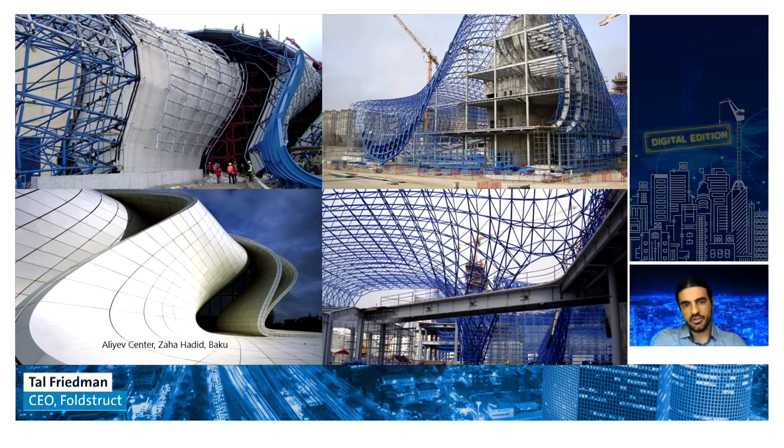However, with all this optimism and this trend, when we look under the hood of these buildings, we see that they are completely unfeasible for mainstream construction. In fact, 99% of the buildings look much more like this. They are too expensive to build, they take too long to build, they're too polluting and too dull on a wellness and architectural level. If I should quote Einstein, the definition of insanity is to do the same thing over and over again and expect different results.

And that is, in fact, what we are doing in the world of construction. If we look at the goals of the industry, we're talking about millions of buildings that will be built and renovated over the next couple of years. And I say that number again, millions of buildings, where we know that 40% of the world's CO2 emissions are created by the construction industry. Combine those two together and you understand why tens of billions of dollars are being spent on energy reduction programs, because we are simply not building efficient enough.

The main reason for that is because we're still relying on manual process, and we're relying on inherent constraints. When you're designing for the human hand, you are designing for the time and energy restraints of the human worker, and of course you will always be limited. So when we want to look at other industries and learn what they've done, we have to really look into the age of a smart factory and how to move away from this kind of manual labor into a much more unified approach. But of course, then we have to ask how to talk to a machine, because if we want to produce with machines, we need to learn how to design for them.

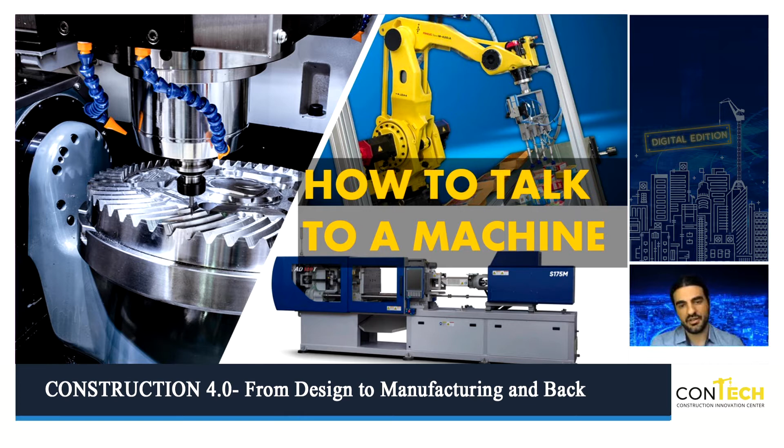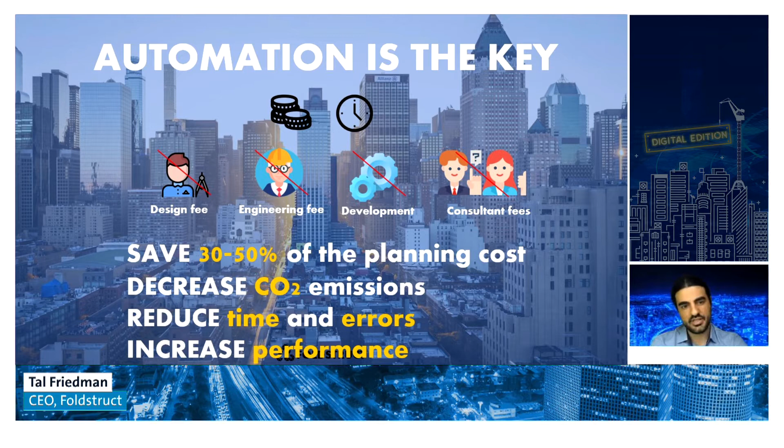In this talk, we're going to talk a little bit about this field called DfMA, or design for manufacturing and assembly, and what this means for an industry. So automation, of course, is the key. We know that doing this, we can save design fees, engineering fees, all the way to actual fabrication fees. We're seeing these numbers everywhere we look and in every industry which has already gone through that transformation.

One of those, of course, being the car industry. If we look at a car in 1921 and a car in 2021, we will see a 10 times multiple in how cheap it is, how fast it is, and how green it is. This actually led to a transformation of a car being a very, very high-end luxury into an everyday commodity. Enough has been said about the effect on the built environment, but we're going to look at the industry and see how they reached these goals, and why the construction industry is so far behind in those terms.

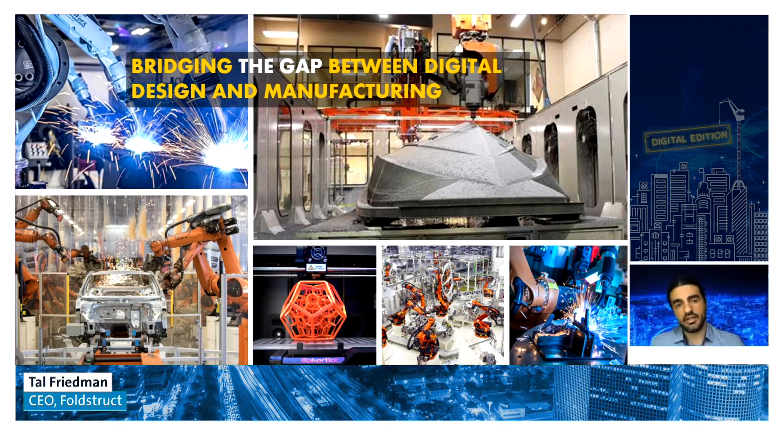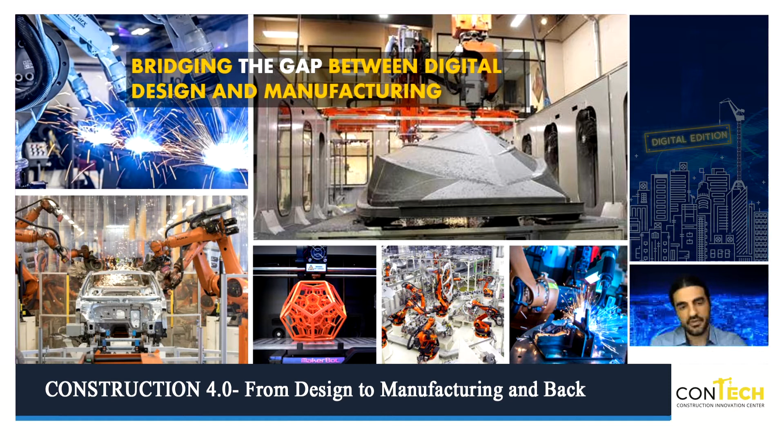So what they had to do was basically bridge the gap between design and manufacturing, taking into account that cars are repetitive in nature. Robots were a very, very efficient way of automating processes. Of course, it started with the assembly line of Henry Ford, but if you can create an assembly line for people, you can also do the same for robots.

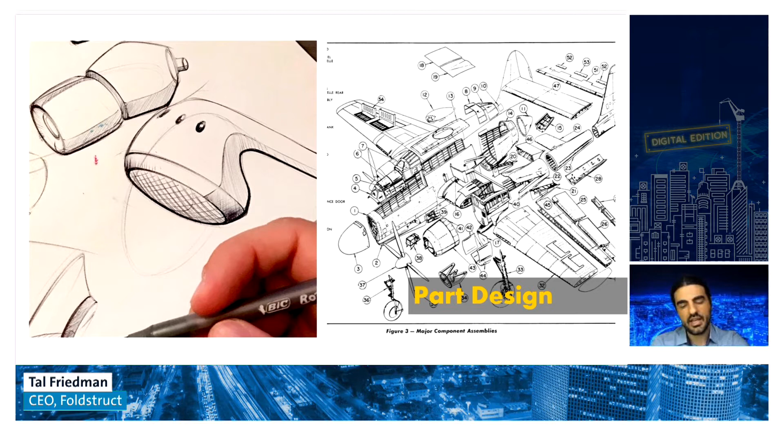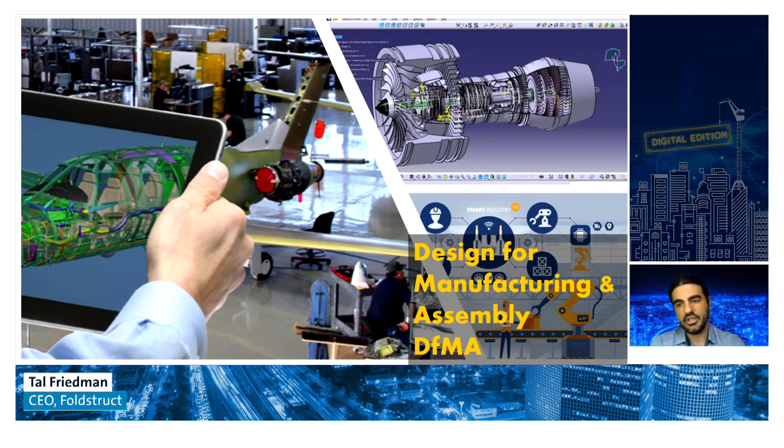But the main revolution was not actually in the manufacturing, but in the design for manufacturing. And that's exactly what we're going to focus on: going from part design to design for manufacturing and assembly. In the industry, this is referred to as DfMA, and it is completely revolutionizing the way people plan, because we no longer have a representation of geometry in parts, but we are taking into account the manufacturing down to the little screw level.

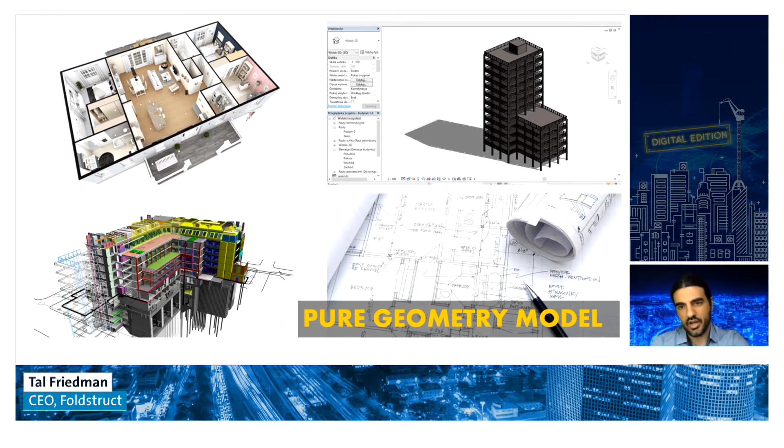So everything is basically a digital twin from design stages. I was talking about pure geometry, and unfortunately, this is where we are in construction today. We still plan drawings, so all BIM software are essentially geometry platforms that draw what could or could not be a building, and we'll only know that at a much later stage as we go through what I call the domino effect. We start with the design, we move to the engineering, fabrication, and sourcing. In this process, we can never go back.

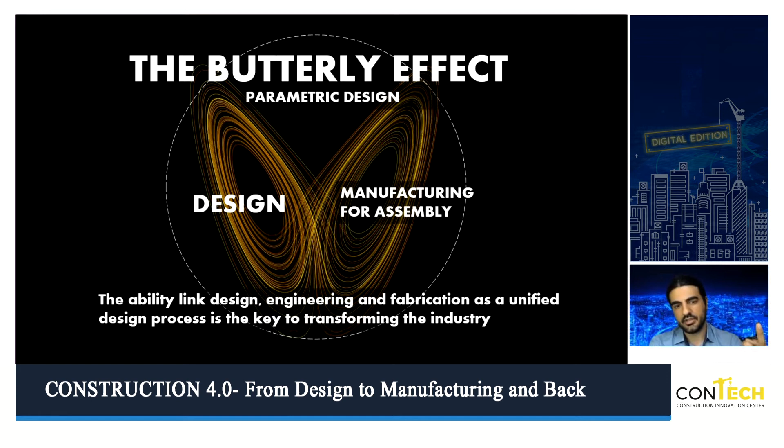I think this is the big difference between design for manufacturing and the design we have today. So we need to move from the domino effect into the butterfly effect, where design and manufacturing for assembly are combined, so that when we make a change in the material, that will already affect our engineering and our design retroactively. Thinking of this as a kind of parallel universe for design where we can go back and forth, and we don't have to create the same linear process over and over again, is the key to AI optimization.

Now, of course, it's not fair to completely compare cars and buildings because, as I mentioned before, cars are repetitive in nature. A single car model can be produced tens or even hundreds of thousands of times, where not all buildings are alike. So it means we have to think of a building as comprised of many repetitive elements, but the building itself is not repetitive.

Now, many people have tried to replicate buildings, but we know what that led to. So we need to think of a building as an assembly of parts, maybe something more like IKEA in nature. And I think that will create that bridge between design and manufacturing.

Now, I'm going to talk a little bit about what we do at the office. And what we do is take these construction methods and try to rethink them and try to create new possibilities of what could be if we use them a little bit differently.

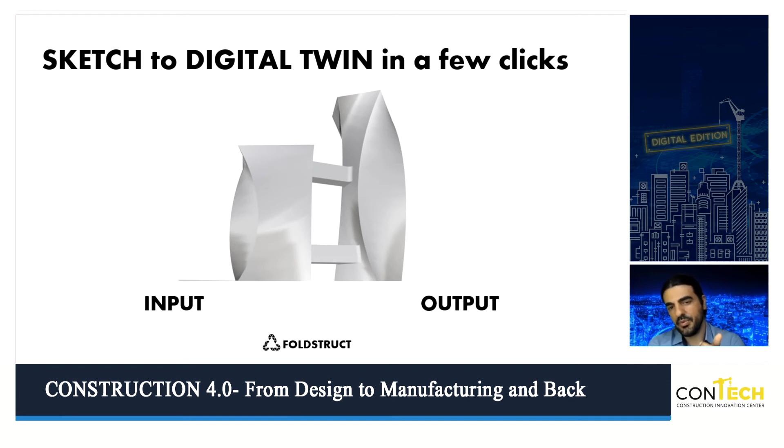So here is a modular system. And we want to ask how to go from a sketch to a digital twin in a few clicks, and feel that magic moment of going from a sketch to reality, or from a vision to a sketch. I think that's what triggers architecture in general.

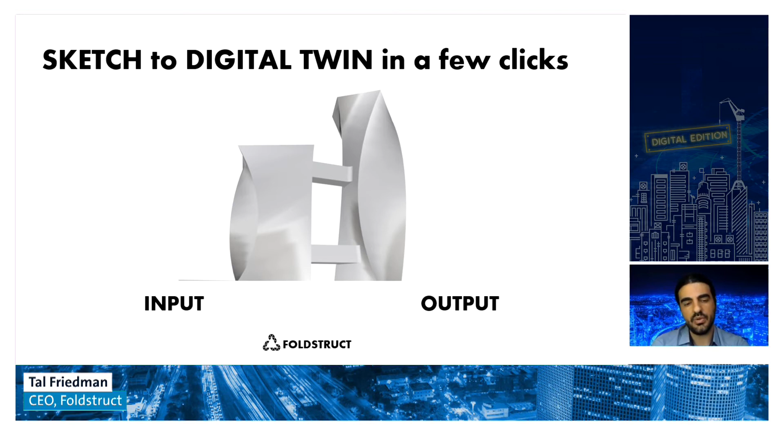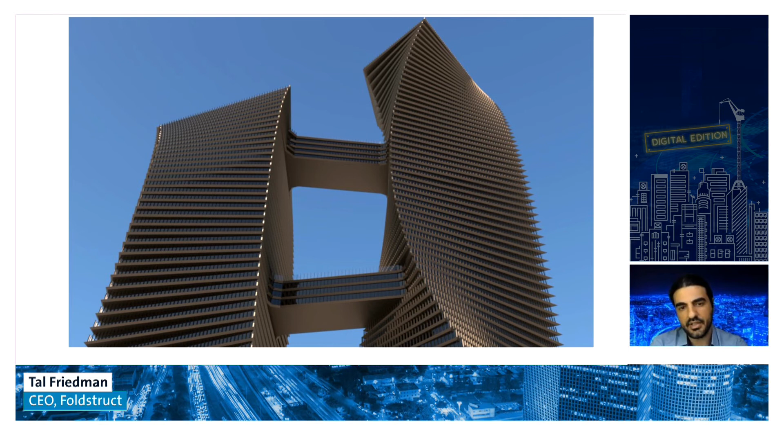So I'm going to show you an example of how we move from this in a couple of clicks to something like this. Now, this building is one that we're working on right now, where we started out with a very basic sketch, and we had to take that sketch as the reference. So what we did was a complete unified flow that took the very same model and then just started adding more and more layers on top of it until we arrived at something like this. And this is all done in an automated way.

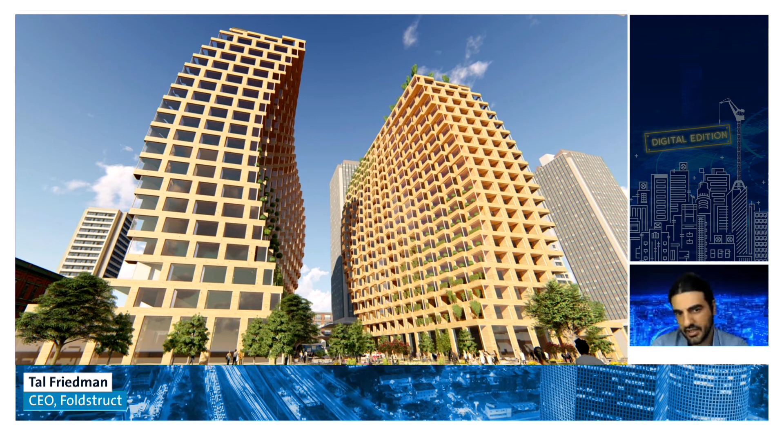Here's another example of something we're doing with mass timber, which again is a modular system where we said, what if we stack them up a little bit differently? Does modular construction really have to be so modular in its complete approach?

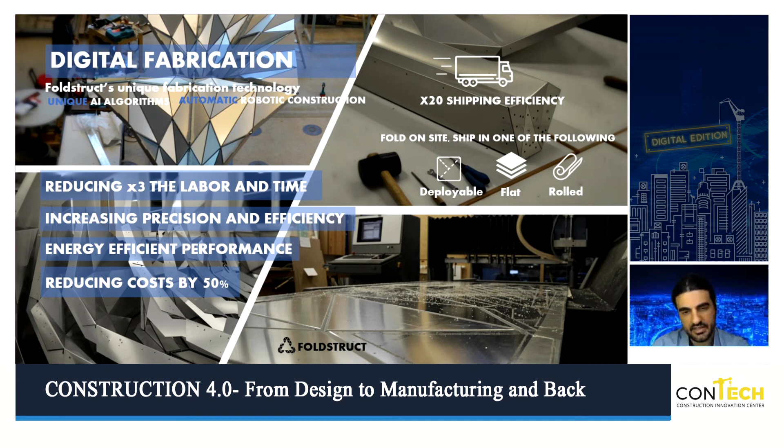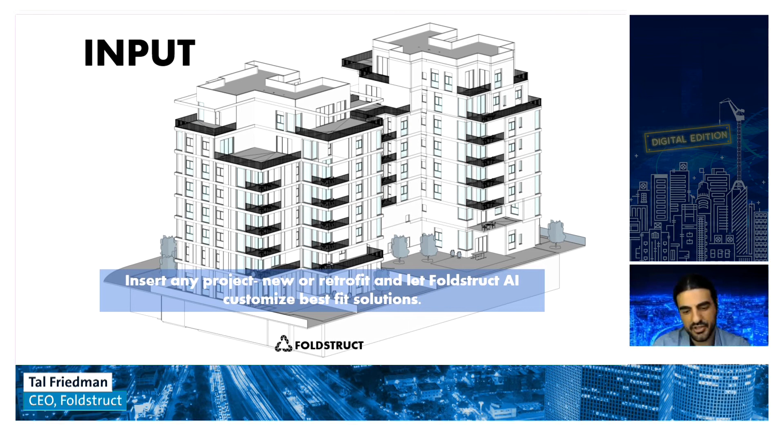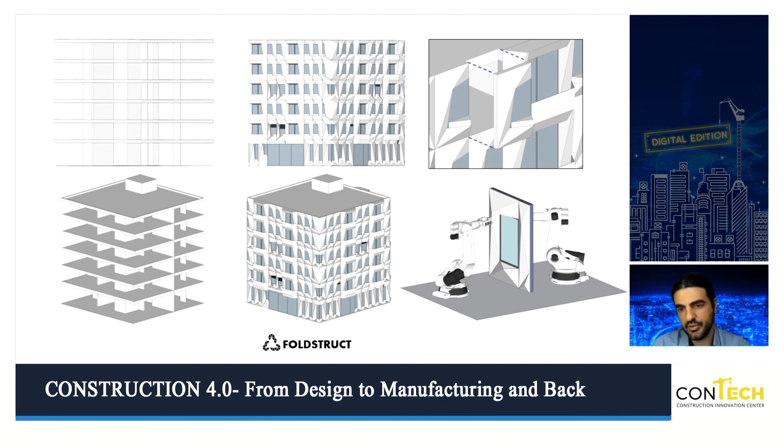Another project we're working on is getting an input where the developer wanted to test the design on a project that they had, and in return they got this from us, working on the very same model in just a couple of clicks. And of course, going from that model, we already go to robotics, to fabrication, and create a unified process.

So if there's something I want you to take from this conversation, and here you can see some of the works that we do in the background, is that modular construction does not have to be repetitive. It does not have to be boring. Robotics do not have to be expensive. The opposite is true. When we learn to use repetitiveness together with customization, we can provide a complete new way of thinking. We can reduce costs. We can improve the performance and design of buildings, and we can get to the goals of the construction world.